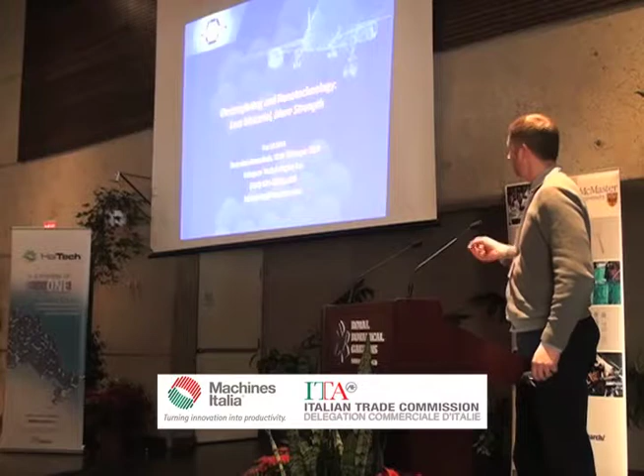I always find it helpful to show a physical description of what it is Integran brings to the table. This is a ping pong ball that has been electroplated with Integran's nanotechnology. The nanotechnology is really the coating that we make, and these coatings can be exceedingly thin. The coating in this case is about 4/1000 of an inch thick, or 100 microns. The end result is a ping pong ball which I can stand on and not have any problem breaking. I'm about 250 pounds, so we can generate an electroplated coating. The nanotechnology is in the coating, and I'll go into more detail there.

But what makes this useful is when you start combining the coating with other substrates. Some of you in the back won't be able to see this, so I'm happy to meet you afterwards and talk a little bit more about it.

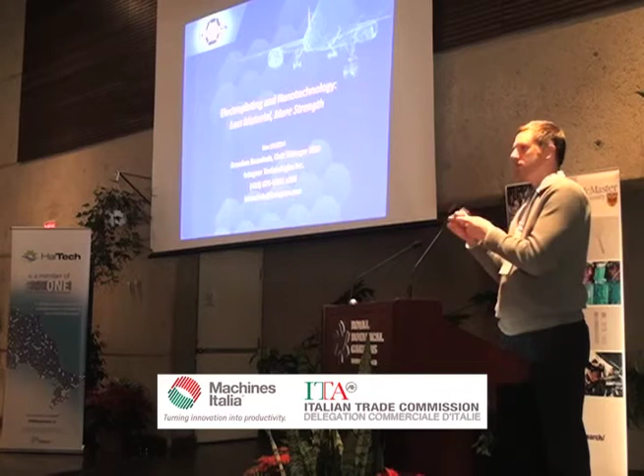We generate a lot of parts that make use of this coating. Here's an example of a fishing reel stem. It's made out of plastic. We then add our Nanovate metal coating to the outside of it. The end result is something that's much stiffer, much stronger, and in effect replaces a machined aluminum part.

Now the benefits really come out when we're talking about things like cost and weight and the amount of parts you can process at a given time, because machining a complex part like this can take quite a bit of effort and cost. You have to have capital machines ready to do that machining for you.

Injection molding, on the other hand, is something that can be done very quickly, and that's where we're focusing our technology. This injection molded part doesn't really have much structure to it until you add the electroplating nanostructured metal on the outside of it, and now you have a part that is equal to a machined aluminum.

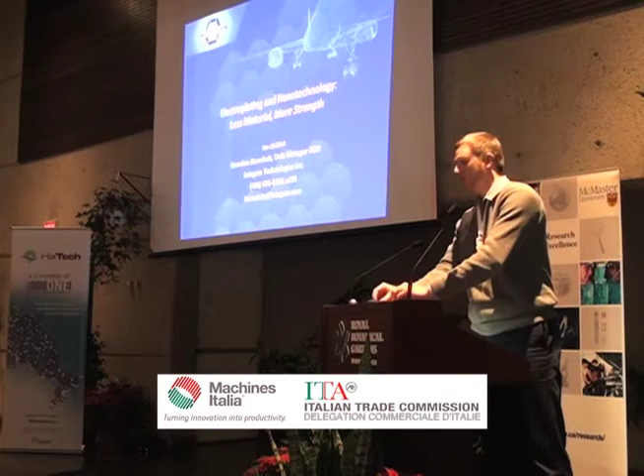That's just one example of the kind of technology that the Nanovate coating can bring. I'll give a number of different examples, but the basic technology is rooted in this Hall-Petch relationship. As you take a metal and you shrink the grain size down, you get drastic increases in the yield strength of the material.

As you take a conventional polycrystalline material and decrease its grain size, you get big increases in the yield strength, and also very high increases in the hardness of the material. Now this does come at some consequence—you do lose a little bit of that ductility—but the way that we process it, we're able to retain enough that it still has a good degree of engineering ductility. It can absorb energy before failure, unlike a ceramic.

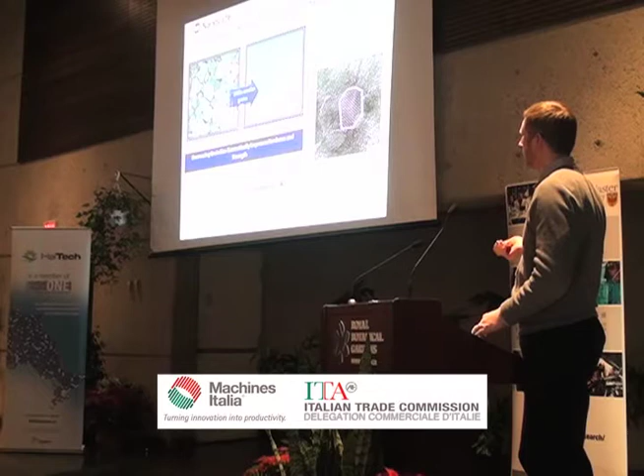Just a little bit more detail—this is a very old image, so I'm sure some of the people here would be able to produce a much prettier picture of what a nanostructured metal looks like. Essentially you have a polycrystalline type of material, more powdered. You shrink the grain size down, and you get increases in yield strength, ultimate tensile strength, hardness, and as I'll go into more detail later, we don't have that consequence in ductility.

So the way that we get this: electrodeposition, conventionally speaking, uses direct current plating, and you put it onto a substrate. The substrate is represented on this side of the image, and the electrodeposited coating in a conventional sense is represented on this side. The very first few layers end up being very fine-grained, but as you continue with the electroplating process, you quickly end up developing more polycrystalline structure, nothing that's really all that structural in nature.

But what we're able to do—the base patents around the technology—is use a pulse plating approach, so that you're always introducing the nucleation phase as opposed to the grain growth phase. If you maintain that, as well as through our proprietary bath chemistries, you're able to keep the grain size of the material very, very small, down to the 20 nanometer range. You're able to do that for essentially infinite thickness and keep the properties uniform.

The grain size is consistent through the thickness, and what we're dealing with here is a fully dense material. We're not looking at consolidation of powders where you might have some degree of porosity. It's that layer of full density that allows you to have the engineering ductility.

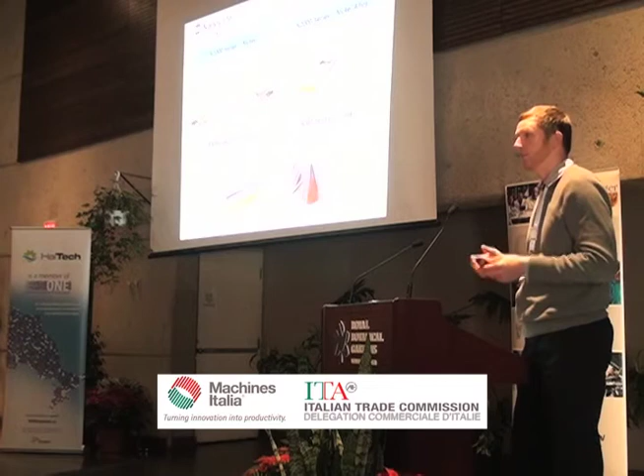Our R3000 series is a cobalt, and that's very good for sliding wear - our hard chrome replacement, galling resistant materials for, say, titanium to titanium mating or aluminum to aluminum mating. And finally, our copper 4000 series, which is an example of an electroformed copper shaped charge liner. This is a material that's picked up a lot of interest for high corrosion resistance, good ductility, as well as good electrical conductivity.

I'll go through a little more detail on a couple different ways in which we use our Nanovate metal, one of which is structural plating, so that'll be on plastics, composites, and aluminum, all in different respects to provide some sort of value for our customers. The second family is in that corrosion and wear protection - this will focus mostly on that cobalt family that we have. And then I thought I'd throw this in there as well, just because it shows a little bit of the flexibility of the process, the ability to produce fully Nanovate metal bushings, and that is what helps differentiate ourselves from a conventional plating.

As I mentioned with this fishing reel stem example, the Nanovate addition to the plastic offers a number of different advantages over something like machined aluminum.

This is a very quick summary, sort of like the one-pager that we provide to people. What you do is you combine the very strong, durable surface hardness with the Nanovate metal, and you add that to the very lightweight polymer core. The combination ends up giving you something that's about 30 to 40% lighter than a machined aluminum counterpart, and that's matching about the peak loads or so. But you have added benefit because you have a surface hardness close to tool steel. We're talking about material that has hardness between about 50 to, in some cases, 65 Rockwell C hardness. So it's a very durable material, scratch-proof, dent-proof, impact resistant.

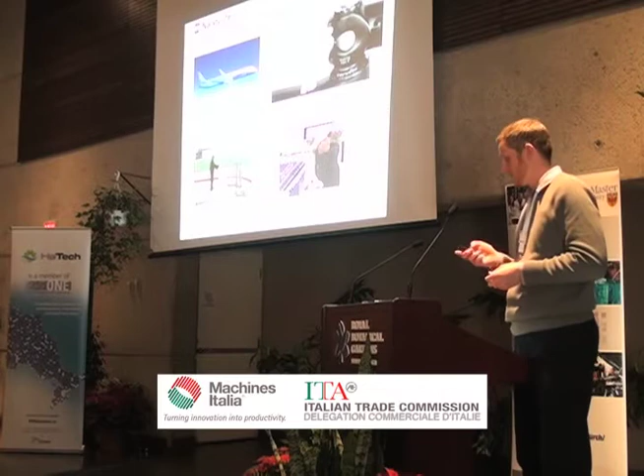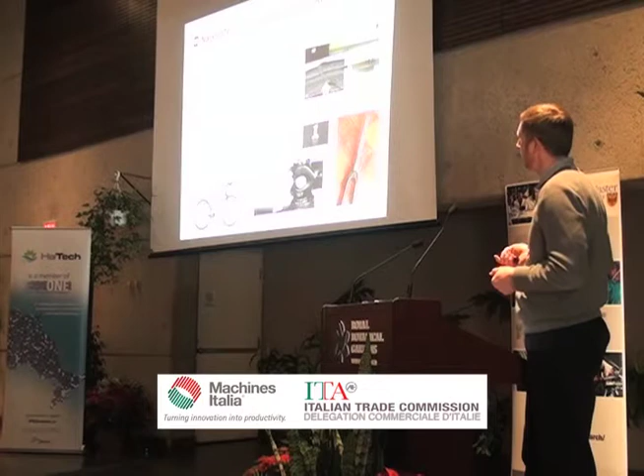So this more or less goes over what I was talking about, but to give you a specific example, the composite bike fork added with 50 microns of Nanovate gave you a 20 times increase in fatigue life. That's fairly important. But what made this special is something else that Integran has designed and invented essentially.

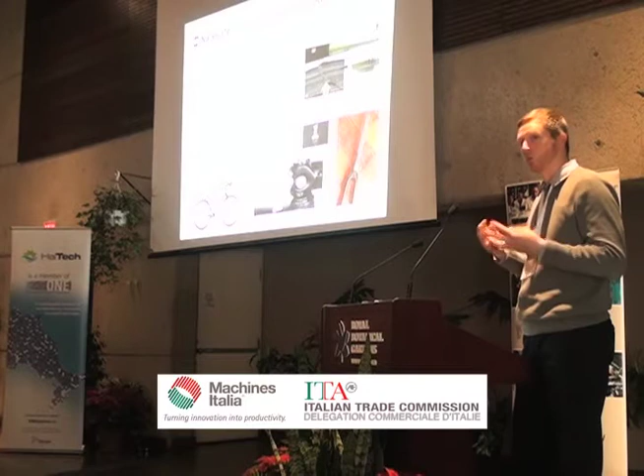This is the Integran material, which enables a good level of adhesion between the composite and the Nanovate metal. That's also something very important across all of our product lines and families - you need a very high degree of adhesion between the Nanovate metal and the substrate in order to effectively couple the loading and transfer the load between the substrate and the coating. So in all cases, this is something we looked at a lot.

This is more or less a pictorial example of what kind of tests we do to show the adhesion. This is a pull-off test, but more or less nowadays we use peel strength. So this is an example of a small coupon that's been treated with our Nanovate material and then metallized, and we peel the top layer away from the composite substrate, showing that you get a good degree of adhesion. I've got one example in my bag here, which I can show you afterwards.

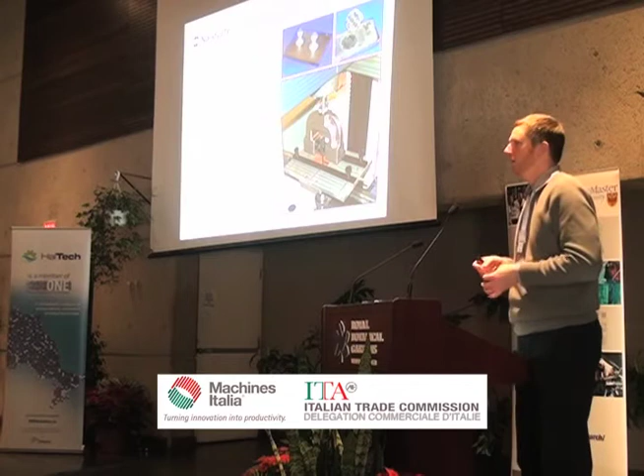So yeah, we can generate coatings on materials. We can also generate self-standing Nanovate materials. In this case, we generated seamless liners that we then used as ID layers for composite tooling, composite-like actuators, tubes and such. The composite is good at providing high strength and stiffness and low weight, but it's not very good at resisting chemical attack. So a very thin liner of our material inserted in the ID, or you wrap your composite around the OD of it, and you've got a material that can be a lightweight actuator with a very high level of vacuum integrity.

We also have a little bit of flexibility with our program. Here's an example of a 40mm grenade launch tube that could be generated with the Nanovate metal liner shaped to give you some rifling, and then composite added around the outside, and that would replace something that's a fully machined aluminum launch tube.

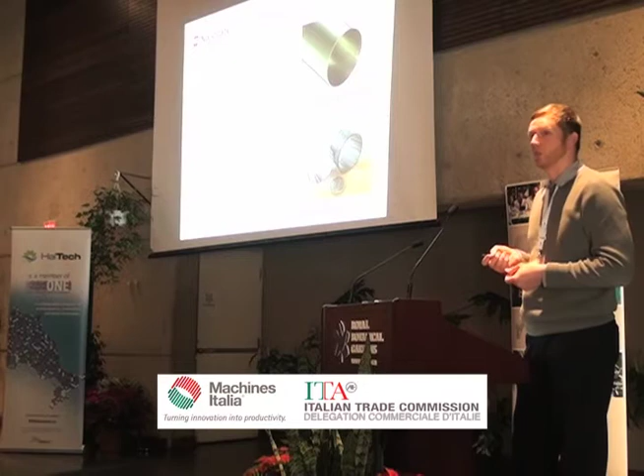The Nanovate on aluminum is an interesting combination. We've got a lot of people who've come to us for titanium. They've got this titanium part, and you plate it to improve its surface durability or something along those lines. But what we actually suggest in that case is, let's move to Nanovate on aluminum. Aluminum is a little bit difficult to get that level of adhesion to, but we've worked out the process to do so. Aluminum offers you, compared to titanium, a lower cost and an ease of machining, and when it comes to surface hardness, we find that the Nanovate really takes care of most of it.

But nonetheless, here's an example of a golf club product. They were using titanium, actually they were using steel even before that. But when they put the steel in their golf club bags, and they have a number of other clubs kind of rattling around and hitting the faces, they find that the faces dent. And that's not something they want to look at or even use for accuracy or aesthetic purposes. So they tried to move to titanium, still didn't really have the surface hardness. They tried moving to aluminum, which had a very hard anodizing on the surface of it, but they found that the anodizing still didn't hold up.

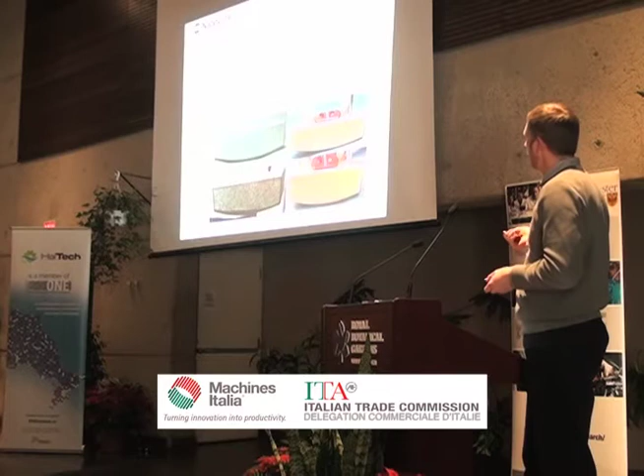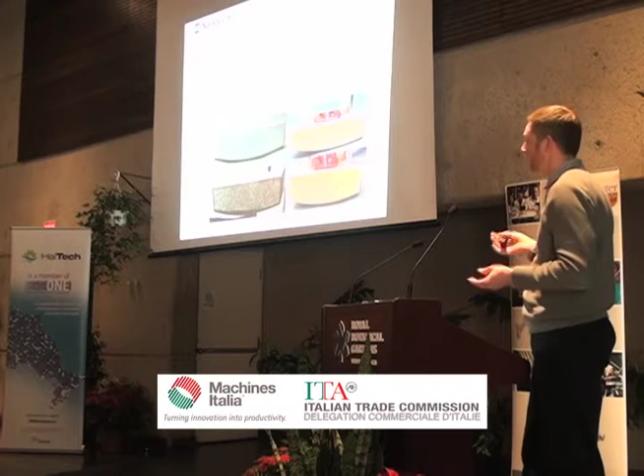And that's what's shown here. So there's a simulated bag shaker test that introduces this kind of damage. So what we did was, instead of the hard anodizing, we applied our Nanovate metal to that same face, and after that same aggressive test, we were able to show that it holds up quite well. So this has been an interesting adoption for sporting goods.

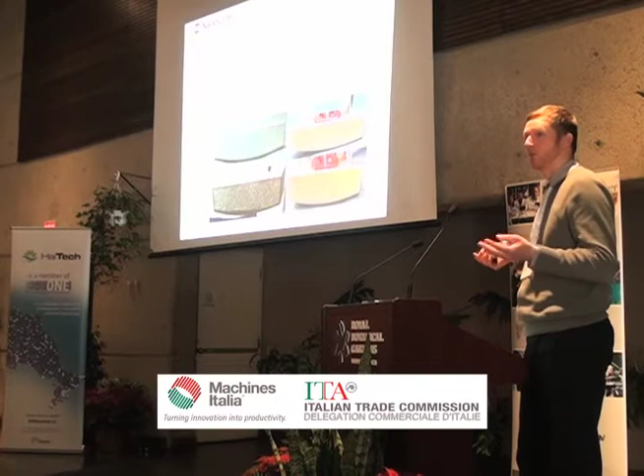And just to summarize, we're really talking about very thin coatings here, so the addition of weight is still very minimal. And if we keep the thickness low, we're able to also process a number of parts very rapidly. Here's an example of some of those other parts that have made use of it.

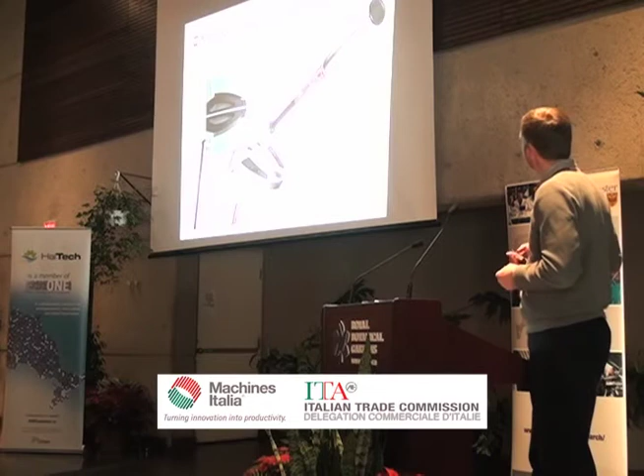Okay, so the second family, corrosion and wear protection. So the cobalt family, the Nanovate cobalt family that we manufacture, is probably our most technologically advanced family that we have. One of the very first DoD projects that we had was in order to find an electroplated coating that you could apply to steel hydraulic bar and reduce the amount of hard chrome that's needed to be plated on these bars. Hard chrome is something that's sort of been targeted for phase out because the process itself is not all that environmentally friendly. There's a lot of negative byproducts that come with the process, and it's very expensive for treatment and cleanup. So finding an environmentally benign version of it that could have the same properties is very high on the list, still is to this day.

This is maybe 8 years later after the original work that we did. So we developed this Nanovate CoP electroplating process, and essentially it's a drop-in for hard chrome.

Except that when you compare the two processes, Nanovate CoP and hard chrome, the Nanovate CoP process is much more efficient. It allows you to process a larger number of parts with the same tank than you would for your hard chrome tank. So essentially take 4 tanks of hard chrome you might need, you can condense that down to 1, because the plating rate is just that much faster. It makes better use of the electricity provided.

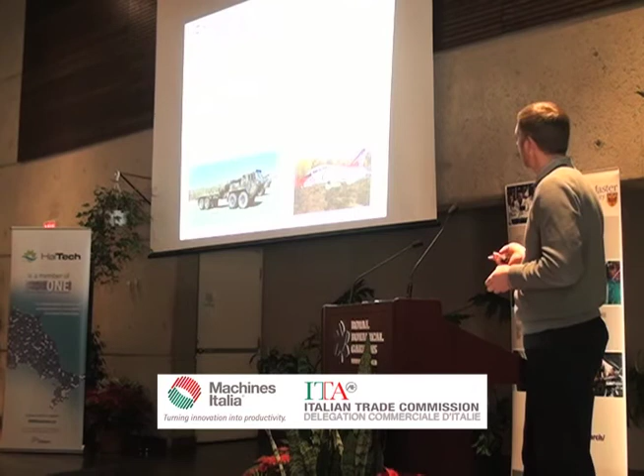And this is the one that's actually been licensed most. A couple facilities down in the US as well as Canada have it. I think we're setting up one in Europe as well. I can maybe put you in touch with people if you're interested in that.

But in terms of sliding wear and the kinds of salt spray that we're requiring here, you can get corrosion and some material coming off. Ours, our Nanovate CoP, on the other hand, is pit, pore and crack-free, so it makes a very smooth and hard surface to be maintained.

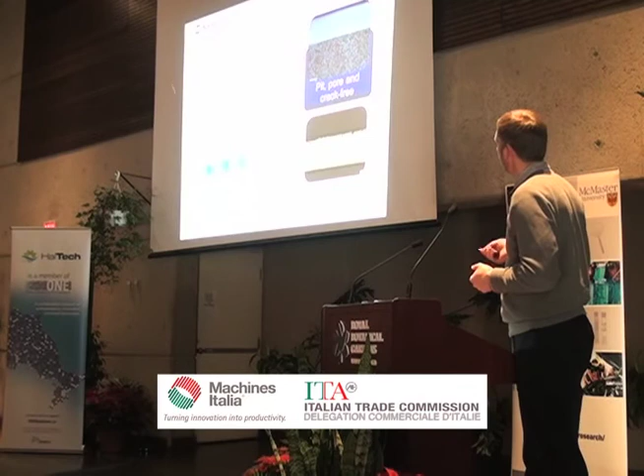Just a couple results from our B117 test. We do a lot of this, and if there's something specific you want to see regarding test data, I'm happy to put you in touch with the right people.

Okay, so this is that last family, the Nanovate high-load bushings. This is what I think differentiates us, or provides a nice visual example of how we're different than conventional plating. You'll see the scale there. These are quite big, the largest one being about 2.5 inches in diameter, and the wall thickness is at least 1/8 of an inch thick, and that's without the flange considered.

So with conventional nickel plating, etc., you would not be able to build out this amount of thickness and still have it as something that you can hold and put into a bushing and have it resist loads. And the same kind of thing goes for microcracked hard chrome. You couldn't physically make a bushing that can stand up to these kinds of things.

So this was actually developed as part of a second project for the replacement of copper beryllium. Copper beryllium is another one of those materials that's on our list to try to get out of our vehicles, engines, etc. The beryllium being a toxic component to that.

So this is something that we came up with very recently. The program just ended maybe a year ago. So we're actively looking for people to generate these bushings so that they can validate for themselves just how well it works. The biggest benefit when comparing this to other materials used for high load bushings is when you have those very big bushings.